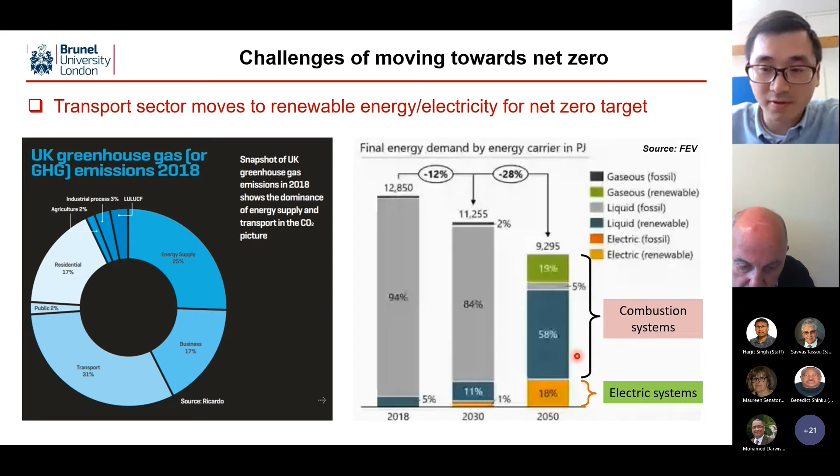So hydrogen is an excellent renewable energy carrier. If we produce hydrogen using water electrolysis and renewable electricity, it can be produced from solar energy, wind energy, or other renewable sources. Then we'll be able to produce net zero hydrogen, which can be used in industry or for the transport sector to speed up the decarbonization process.

Currently, more and more countries are committing to work on research and development of hydrogen technologies. In the UK, the government has set out the UK hydrogen strategy, and the recently published 10-point plan also highlights the significance of hydrogen energy.

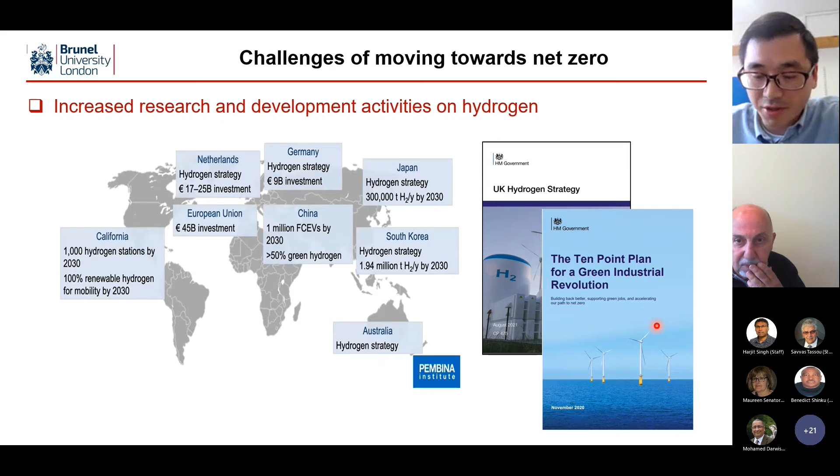However, it is not straightforward to apply hydrogen in industry, and in particular in the transport sector. There are mainly two barriers. The first one is hydrogen storage.

The second barrier is hydrogen infrastructure, because hydrogen is not compatible with existing fuel stations. So we need to put a lot of investment into hydrogen infrastructure, and it can take a very long time to complete. So it will be very difficult to realize immediate carbon reduction targets.

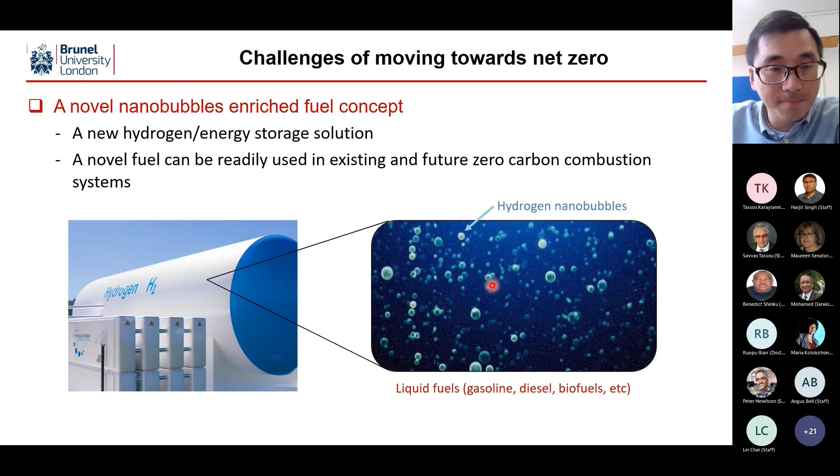What are nanobubbles? Nanobubbles are unique bubbles compared to larger bubbles. They are very, very tiny—we can't see them directly—but compared to larger bubbles, they can stay stable in liquid, because larger bubbles can easily escape from the liquid due to buoyancy. The right graph shows optical measurement results of hydrogen nanobubbles, and we can see these tiny bubbles.

They can keep stable for almost 3 months, so they are quite unique.

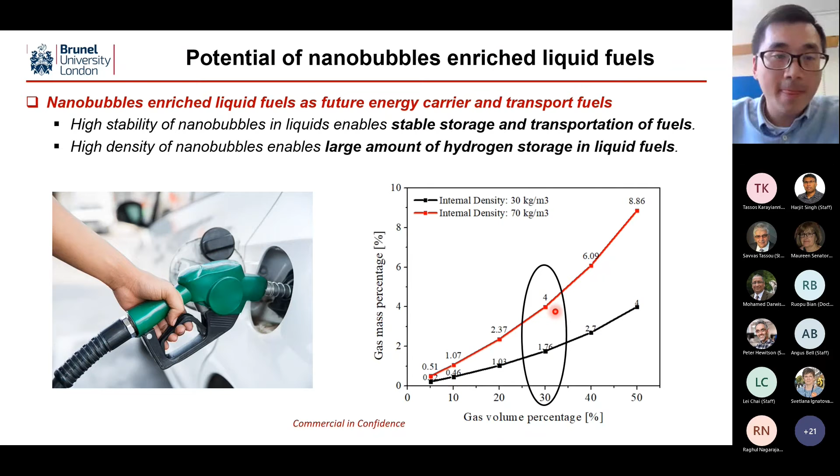Another key benefit of nanobubble fuel is we'll be able to improve the spraying process. As highlighted by the right graphs, we'll see better atomization of the injection process if we add bubbles into liquid fuels. The lower part of the results shows the spraying without bubbles.

However, for conventional technology, adding large bubbles causes a problem of unstable spraying process, because large bubbles can disappear or evolve into smaller bubbles, so the spraying process is not stable. But using very stable nanobubbles will resolve this issue and make use of the improved spraying process.

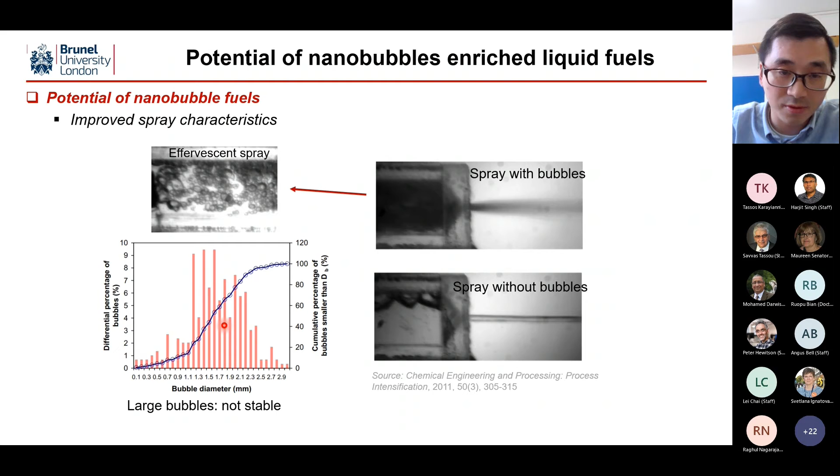The second benefit is improved combustion process due to the significantly higher flame speed of hydrogen. The higher flame speed also enables lean combustion and ultra diluted combustion for the combustion system. This will be able to improve engine efficiency and reduce emissions.

In summary, the proposed nanobubble fuels will have immediate CO2 reduction due to higher calorific value, lower carbon content, and improved atomization and faster combustion, as well as being applicable to existing infrastructure for faster adoption of the fuel concept.

Secondly, we'll be able to achieve net zero if we are using renewable liquid fuels, for example ethanol or methanol, as the base fuel. This will be enabled by faster flame speed and higher calorific value due to the added hydrogen.

We also did a calculation of the potential for CO2 reduction. Similarly, by adding 30% of hydrogen nanobubbles by volume, we'll be able to achieve around 15% CO2 reduction.

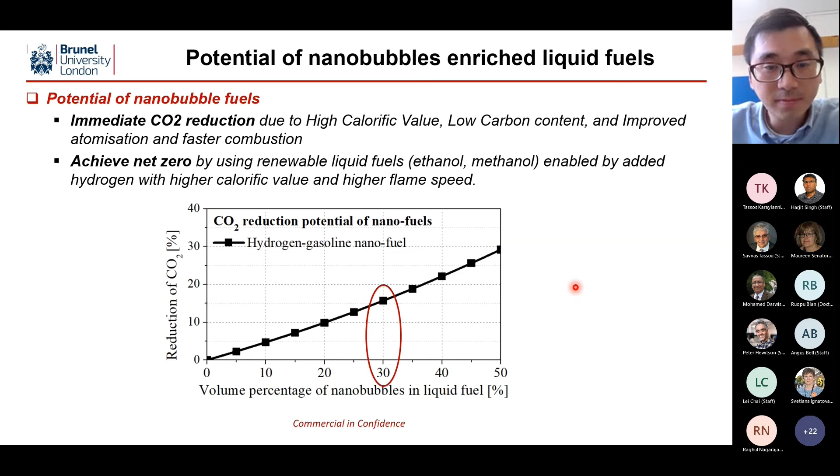As mentioned by Tassos, recently we got another EPSRC project on a completely new net zero future fuel. The concept is we combine ammonia and hydrogen nanobubbles.

We know ammonia is another important zero carbon vector for future transport or industry. However, ammonia has some disadvantages in terms of lower flame speed as well as lower calorific value. So it will be a great combination if we add hydrogen into liquid ammonia.

The concept is we use renewable energy to produce hydrogen as well as ammonia, then put hydrogen nanobubbles into liquid ammonia. Then we'll be able to use this new fuel in existing transport sectors, and the produced exhaust will be only water, so it can be recycled to produce the fuel again.

The novelty of this concept is it is a completely carbon-free fuel, and the added hydrogen can optimize the combustion process, increase energy density, and the combination of the two will improve engine efficiency.

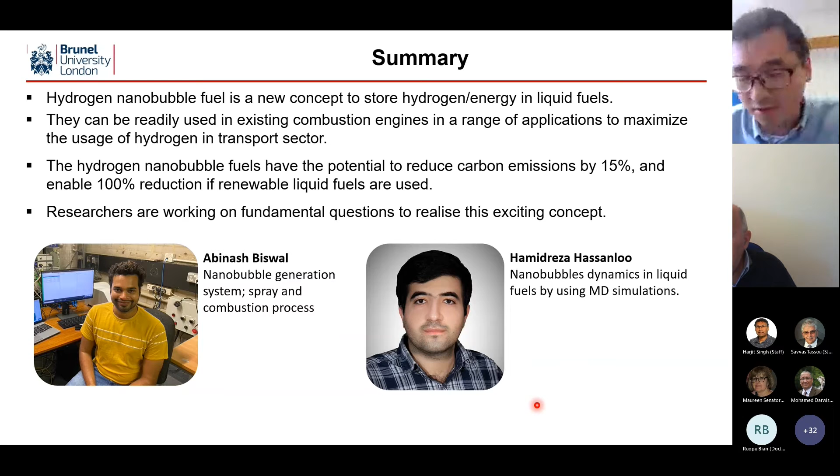Brilliant presentation, very clear. Can I pass it on to the floor for questions or comments? We've got a good 5 minutes. Please just unmute yourselves and ask your question. I see some raised hands. Who is raising their hand? I am. Okay, can you please ask your question?

How and what will be the technology to make the nanobubbles? That's a good question, and we have a number of choices. Currently we have a pressurized system. Basically, you combine liquids with both liquid fuels and gaseous fuels. You compress the liquid and then release the pressure. It's like opening up a Coke - you'll see the bubbles coming out. But if you repeat the process, you produce nano-sized bubbles in the liquid, but you can't see them. Maybe you would find it if you measured the Coke. Have you tried it? Yeah, we tried it, yes.

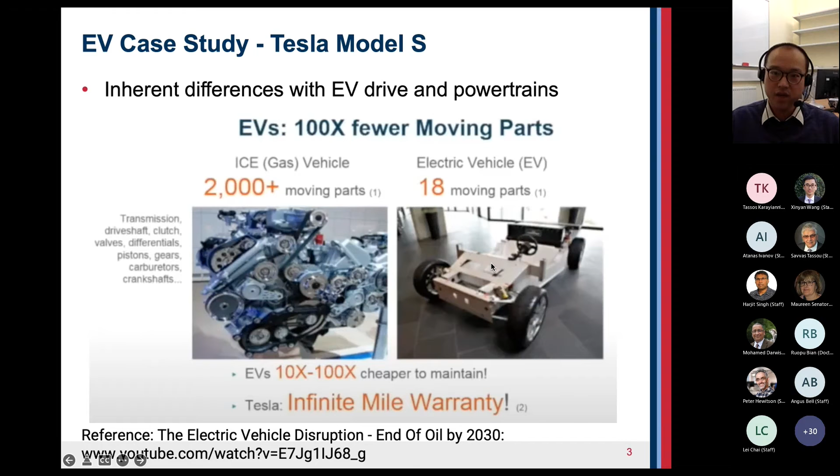In this case, the reliability can be enhanced greatly. And in some cases, for example Tesla, they mention infinite mile warranty for some of the parts because they are so confident that, in some cases, the motor will last for many, many years.

So for the electric vehicle, as I mentioned, the battery and the motor are the key components, and of course there are other components as well, which I will talk about more in the coming slides. For electric machines or motors, it has been investigated since even the early 1800s, for example the DC machines and AC machines, where DC is direct current and AC is alternating current. There are some names like Thomas Edison, who promoted DC, and Nikola Tesla, who promoted AC systems. So in this case, the machines have become a very mature technology already.

And of course, it's been an ongoing research area for electrical machines, making brushless machines with better performance, efficiency, and that last longer. And for the battery, of course, electrochemical cells have also been researched for a couple of centuries before.

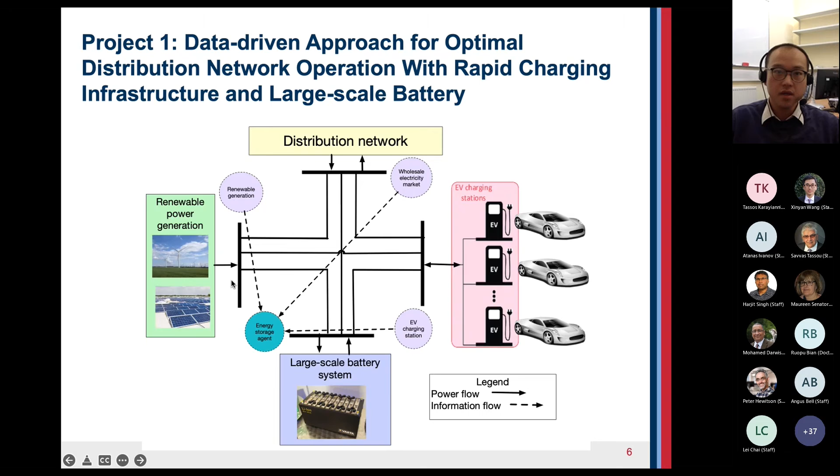As the project is coming to an end, we have some publications already presented at conferences, as well as journal articles. This month, we had a paper accepted on a distributed optimization model for mitigating three-phase imbalance with EVs and grid battery. The idea is that distribution systems use three-phase power, but for EV charging, typically each EV could be using single phase.

How to maintain three-phase balance when electric vehicles are charging using single phases is addressed in this work. The ongoing work is about profit maximization for large-scale energy storage systems to enable fast EV charging infrastructure in distribution networks, mainly using reinforcement learning to maximize the battery operator's profit based on several uncertainties using a data-driven approach.

This second project, a collaboration with partners from Indian universities as well as the government, is about the electrification of public transport and intermediate public transport in Indian cities. India also has a very high interest in decarbonization in transport, and one interesting point is that a lot of citizens rely on intermediate public transport, such as three-wheeler and two-wheeler vehicles, which they use both for transportation and charging.

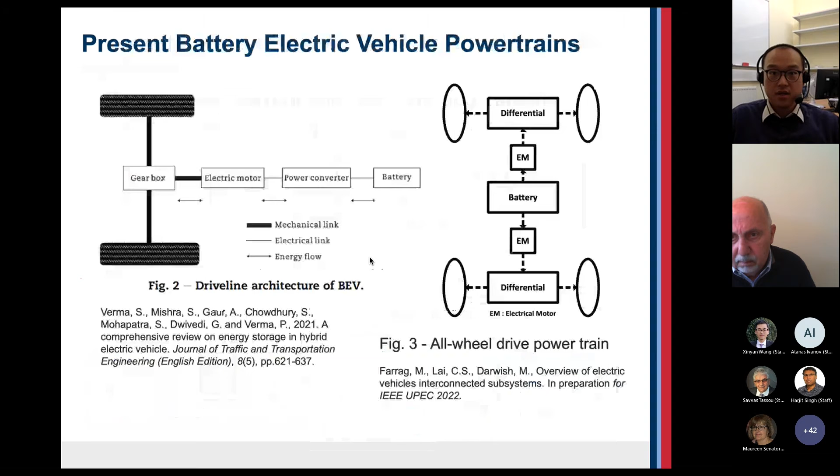I'll skip this slide. Presently I'm also supervising a couple of PhD students, as well as one MEng group project related to electric vehicle systems optimization and electric vehicle drivetrain optimization. Thank you very much for your time, and please feel free to contact me if you have any interest in my research.

Thank you, Chun, excellent. I think we have a raised hand from Mohammed, if I'm not mistaken. Good morning everyone, thank you very much Chun for the excellent presentation.

Just two quick questions. The large-scale battery system, is this special batteries, or is it second life electric vehicle batteries? At the moment we just consider it as a base case lithium-ion, just a standard battery, so it's not second life or an alternative energy storage.

Your question is very relevant, because to be honest I'm not very fond of using batteries for grid-scale storage as they degrade quickly and are expensive. There are other kinds of stationary energy storage available, like thermal energy storage, and in my postdoctoral research I investigated the economics of thermal energy storage, which is also very beneficial.

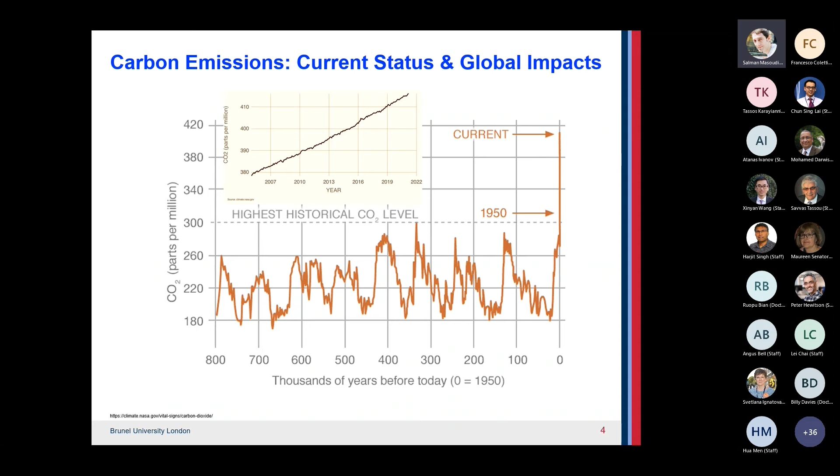So why is it really important? As we all know, it is evident that the atmospheric concentration of CO2 has been sharply on the rise within the past decades. Now it's currently standing at about 410 ppm. As it can be seen here, there has been a clear soaring rise in carbon concentration just within this and the previous century. Now, this increased atmospheric CO2 concentration will give rise to global temperatures, which will bring about catastrophic side effects as a result of climate change.

As a result, it has been internationally agreed to limit the increase in global temperature to less than 2 degrees C, as we all know. But unfortunately, with business as usual, an increase of 6 degrees C appears to be well within reach, which would render an extensive geographical regions uninhabitable.

Now, there has been a significant increase in global carbon emissions with a fairly steep projected rise within just the next few decades. Most of these carbon emissions, however, originate from transportation, industry, and power sectors, as you can see here, with other sectors generally contributing to smaller shares of such emissions.

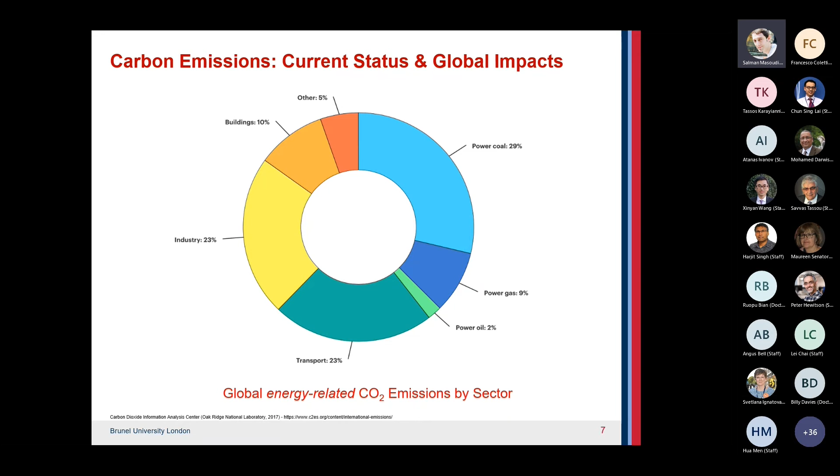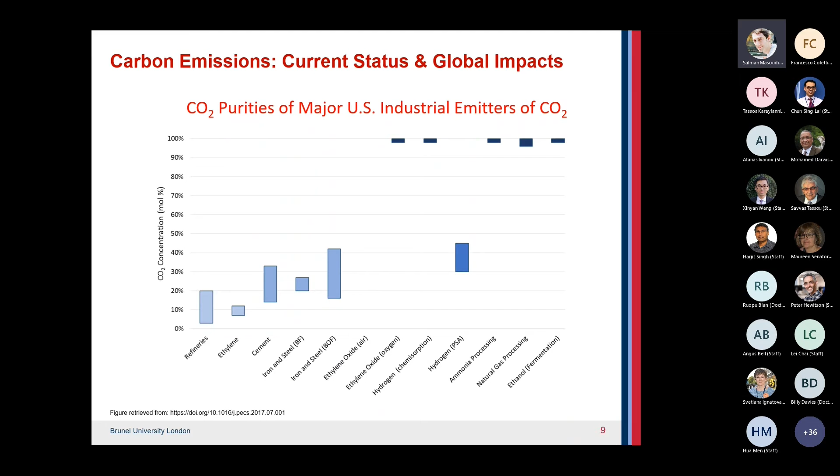Now, having this said, the quality of such carbon emissions is highly industry dependent, as seen here. So it ranges from 3 to 4% to near pure CO2, depending on the process involved. This will in turn dictate the difficulty of separation and challenges involved in terms of energy consumption and hence the total process expenditures.

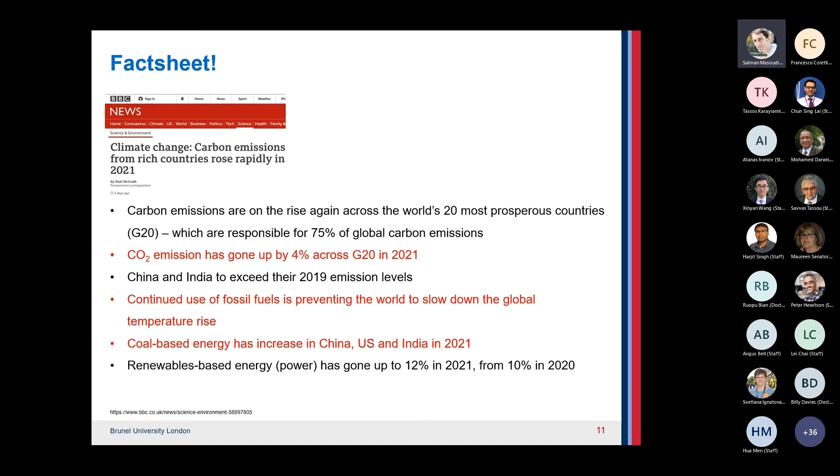Now, this slide shows the carbon emissions have been on the rise in 2021 across the most polluting nations around the world. The continued and in some cases the increase in coal-based energy has been another contributor to this observed increase. Overall, the message here is that although we are moving towards a fossil fuel-free world, there is still quite a few steps to take in order to get there in our lifetime.

Now, as reported just recently, climate impacts have sadly led to a considerable loss of lives around the world and imposing huge economic costs.

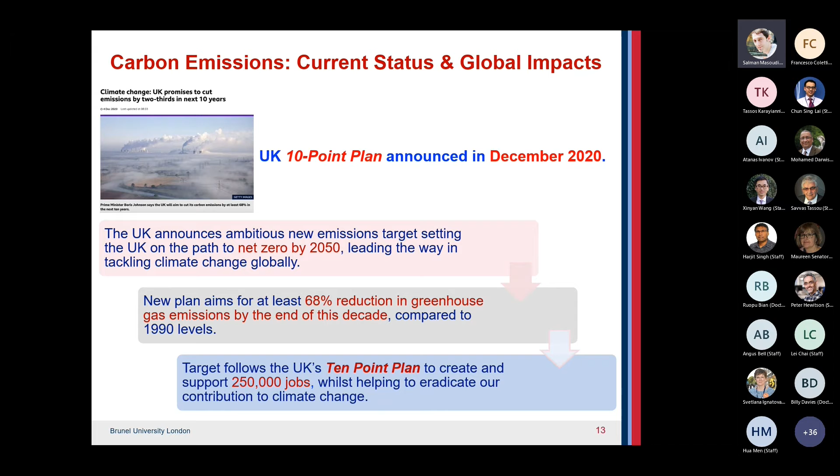Now, based on this, in December 2020, the UK announced its ambitious 10-point plan to meet net zero emissions by 2050, which was previously set at 80%. This will then bring about a significant economic boost to the nation. Now, interestingly enough, the 8th point in the plan is directly linked to carbon capture, utilization, and storage, with significant funding to support industry and create new job opportunities across the country.

Even better, early last year, the UK announced its industrial decarbonization strategy, which is a little bit different from the power sector. And this aims to generate 20 terawatt-hour per year of low-carbon power in industry by the end of this decade, while capturing 3 million tons of CO2 per year. So this is quite a significant amount. So all this shows the extent of urgency and commitment for the deployment of CCS technology in the UK.

Now, we can also see that 2 major CCS clusters have been just given the green light for deployment, and this would simply give access to about 41 projects to basically utilize and exploit these facilities. And biomass combustion with carbon capture and direct air capture have also under development for deployment by the end of this year in smaller scales, obviously.

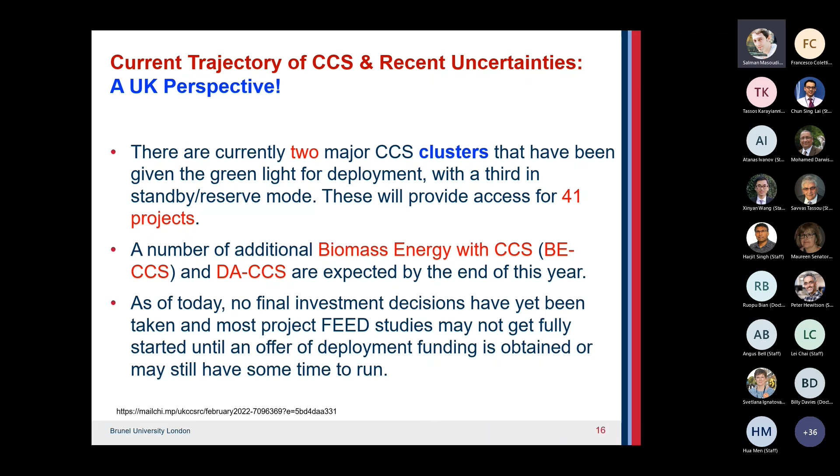Now, if we want to have a UK perspective and the current political climate in the world, we can see that the current war that is going on in Ukraine, it's led to a significant rise in gas prices. Now, this has now brought about a high degree of uncertainty in regards to the future economy and may well impact the funding allocation and decisions for CCS as a whole by the Treasury in the UK.

Now, the message here is that if we want this to go ahead, we have to come up with blue sky thinking and making sure that we're able to have some sort of radical thinking to make sure CCS projects would take off just in time.

Now, a little bit on the what and how with regards to CCUS. So let's see what CCS is. CCS simply refers to a collective set of technologies that comprise capturing CO2 and then either using it to produce other value-added products or basically permanently storing it in the ground.

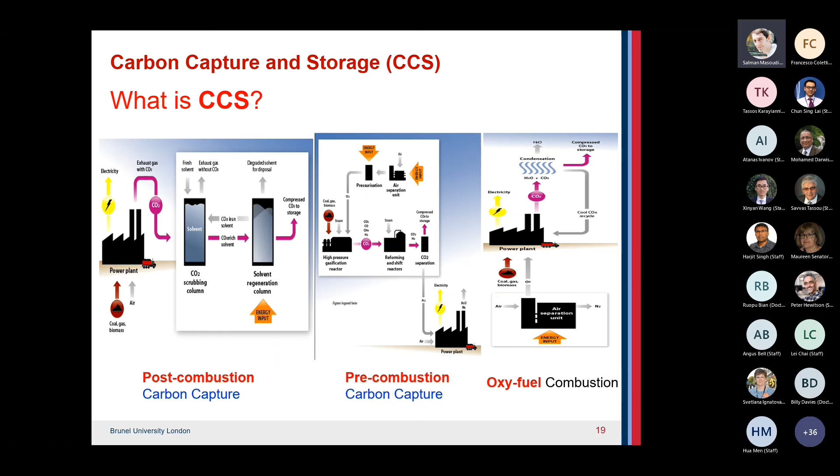CCS is typically classified into post-combustion capture, pre-combustion capture, and oxy-fuel combustion, depending on the way carbon is captured in the process. Post-combustion carbon capture, which is the topic of this presentation today, involves capturing CO2 at its emission point, such as power plants, flue gases, and industrial processes such as hydrogen production. I will now expand further on post-combustion carbon capture within the next coming slides.

Besides the strong political incentive and operating challenges of capture plants, the key barrier to widespread deployment of CCS is the relatively high cost, as with any other technologies. High capital and operating expenditures are the main barriers for the deployment of the capture technology at a scale at the moment. However, we have to bear in mind that as with any other technology, the associated costs would initially go through a rising phase, after which they begin to fall. Once the first of a kind process is commercialized, then these costs basically will begin to come down or become more economically viable.

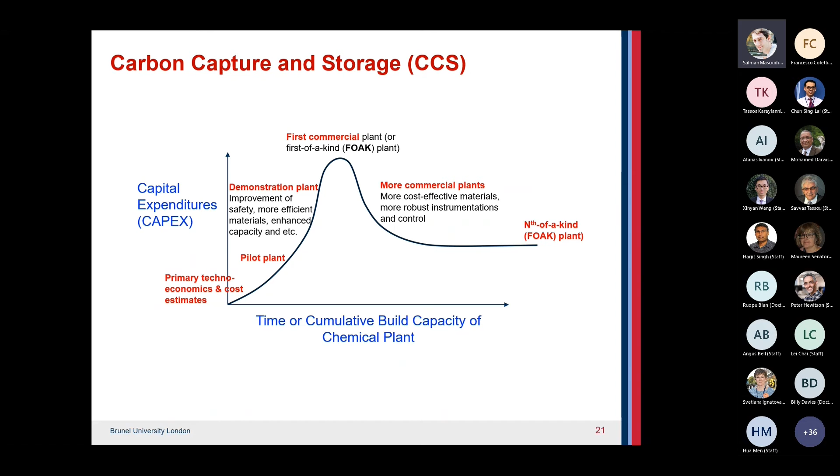Now, there are several research gaps in this area, which for most part would require further improvement. The first one, which you can see here at the top of this slide, is basically the most challenging issue, which is the energy consumption of the reboiler in the stripper. This is obviously the main challenge associated with absorption-based carbon capture technologies.

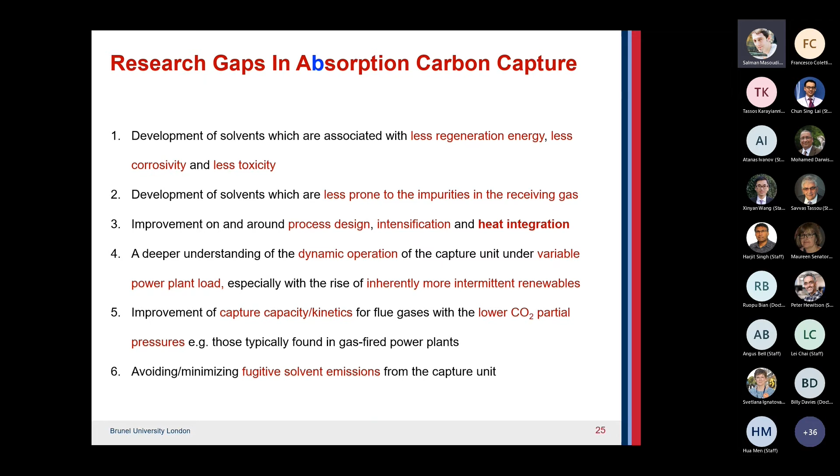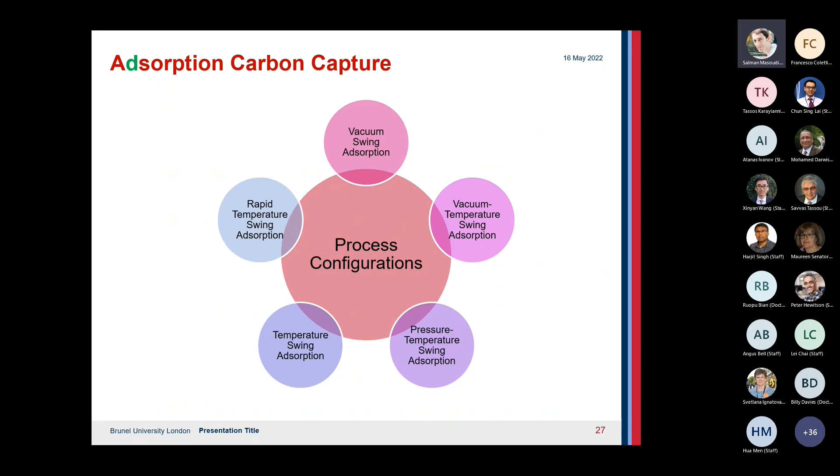Now, the regeneration of adsorbent is normally done by changing the temperature or pressure of the column, hence the temperature or pressure swing. In more complex processes, a combination of these technologies have been employed to improve the overall efficiency of the process. You can see here on this slide, such as vacuum swing adsorption, rapid temperature swing adsorption, pressure temperature swing adsorption, and so on and so forth.

In principle, step-by-step process development in adsorption CCS begins by developing a new adsorbent material and then tailor-making existing adsorbents for a specific CO2 separation, depending on the properties of the inlet gas. The next step is to prove the concept: we study equilibrium, kinetic, and heat of adsorption studies, mass transfer studies, and conduct feasibility studies, which lead to a good understanding of the viability of the process itself.

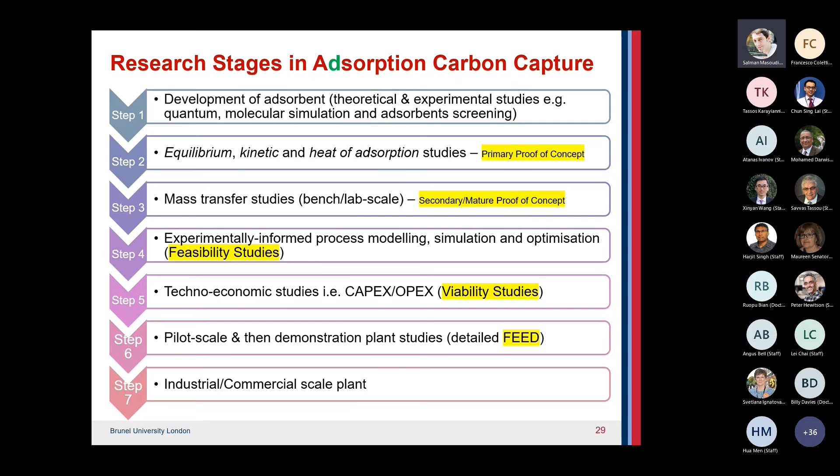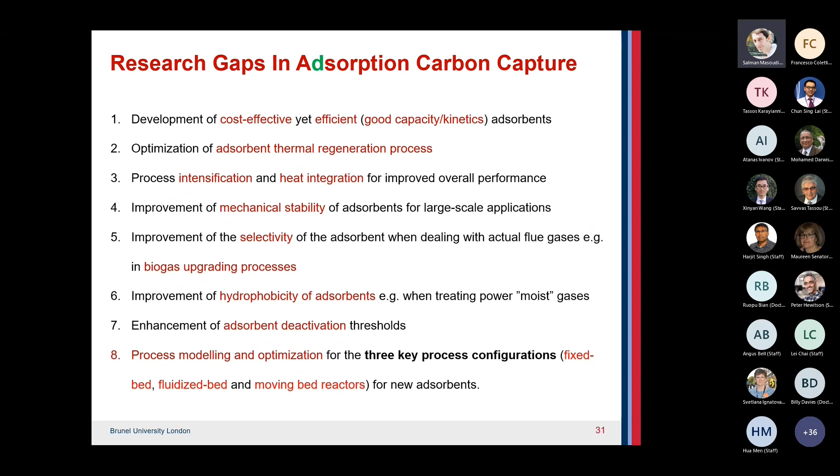These are some of the challenges associated with adsorption processes: the adsorption capacity, the kinetic and equilibrium capacities, the adsorbent itself, its thermal and mechanical stability in the process, selectivity, and the energy consumption for regeneration. These are some of the very important challenges we are basically facing at the moment.

In terms of more recent research directions, there seems to be an increasing interest in integrating artificial intelligence with CCS in order to improve process efficiencies. This is typically done by generating data and then using it to develop and train an artificial neural network, or ANN. The developed ANN would then be able to predict the behavior of the process and ultimately pinpoint the optimum separating conditions for a specific separation.

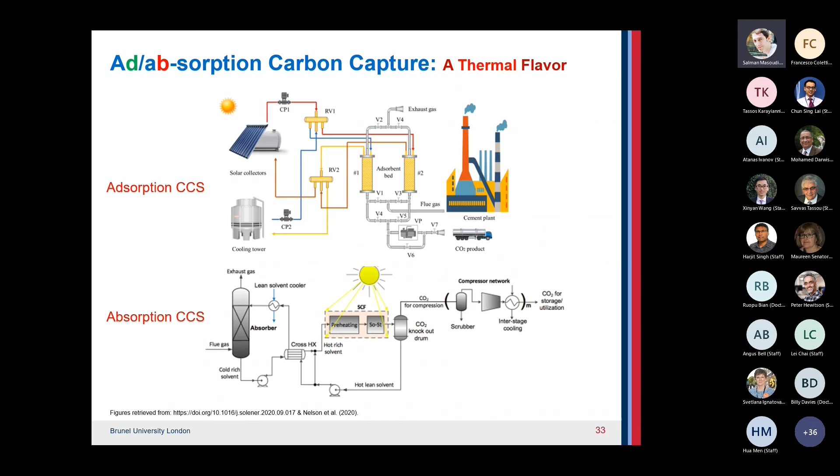There has also been increasing interest in employing solar energy in the regeneration of sorbents. This is where the research we do here in Brunel meets with some of the research going on in mechanical engineering, for instance. This renewable energy can be integrated with a circulatory boiler in the case of absorption CCS, or with a desorption column in the case of adsorption CCS. Such examples are depicted here on this slide.

Now I want to move on and talk a little bit about biomass energy with carbon capture, which is a roadmap to negative emissions. This is part of the research that I do in my research group, as well as an important aspect in meeting net zero emissions within the first half of this century.

The combustion of sustainable biomass is a net zero emission process. This is because during the combustion of biomass, only the CO2 that was previously removed from the atmosphere during the plant's growth is put back into the atmosphere. However, if this CO2 is further captured, i.e. BECCS, we are looking at a negative emission process, which combines biomass combustion and post-combustion carbon capture technologies.

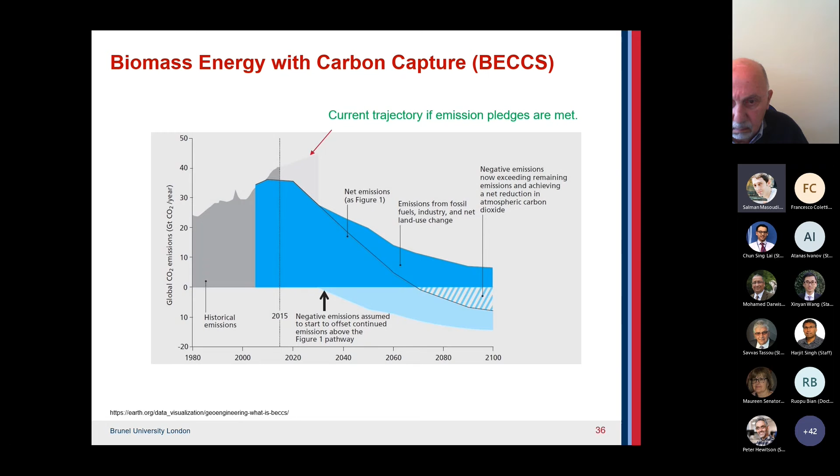So what has been done around BECCS in the context of negative emissions in the UK, and around the globe? There are only a few commercial scale BECCS plants in the world, with many more to be built in the years to come. Drax, the largest power plant in the UK and traditionally a coal-fired power plant, is now the world's largest biomass-fired thermal power plant. This means Drax is now well on track to achieve net zero emissions.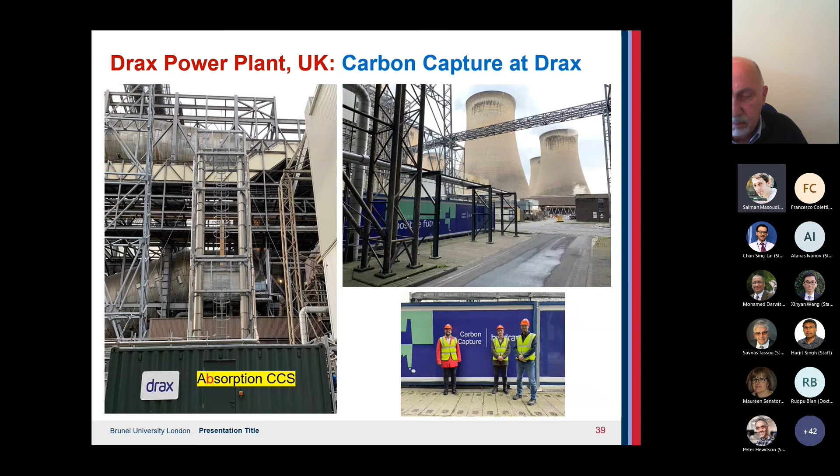Moving on to the last part of my presentation, which is my research around BECCS. Again, this is a schematic of a power plant. You can see some of the solid residues that are basically produced at the plant. What we have thought about is to use this material that is being produced on site and exploit it to produce some value-added materials, or adsorbents, in this case.

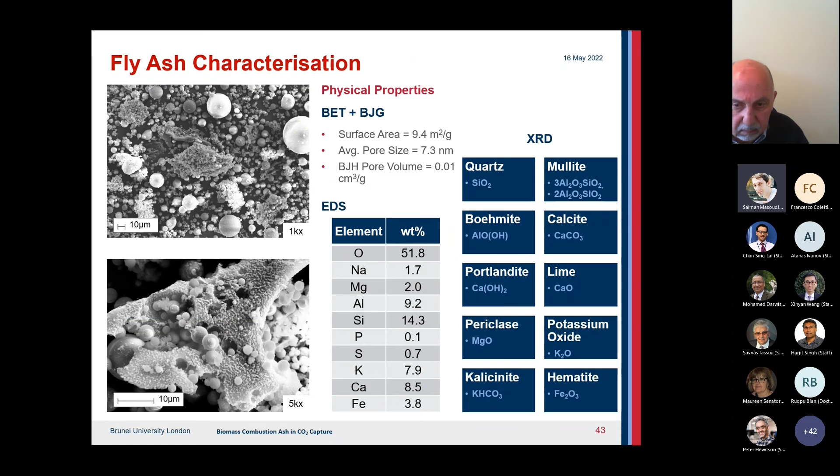We managed to use fly ash and bottom ash generated at Drax to produce two different types of adsorbent materials to capture CO2. Here are some of their properties, and you can see the capture capacity of these materials, which is very good compared to commercial grade activated carbon or other adsorbent materials in industry.

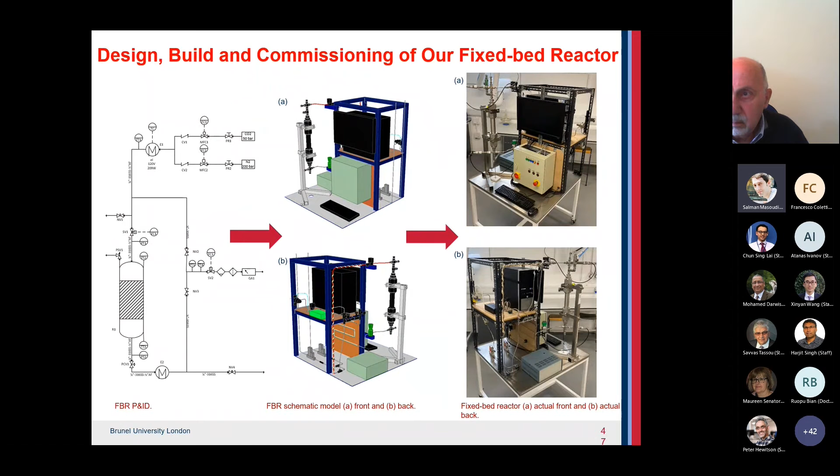This is an adsorption rig that we've built in our group as part of a funded project, and the work of one of my PhD students, Ben Petrovic. Here you can see the work that Ben has successfully completed in my research group. These are some of the steps we normally take to evaluate the efficiency of the adsorption process for one specific separation.

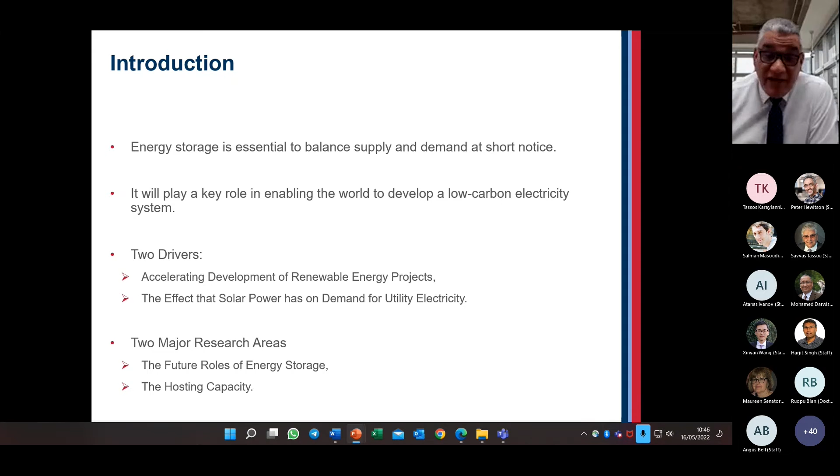After these two drivers, I will present very briefly the two major research areas we are working on in BEPS: the future roles of energy storage, and a very important term nowadays, which is called hosting capacity. So the first driver is accelerating development of renewable energy projects.

According to the expectations of the International Energy Agency, there is an expected average of around 305 gigawatts per year between 2021 and 2026, according to the main case forecast. As we may know, there are three cases which IEA considers: main case, accelerated case, and net zero scenario.

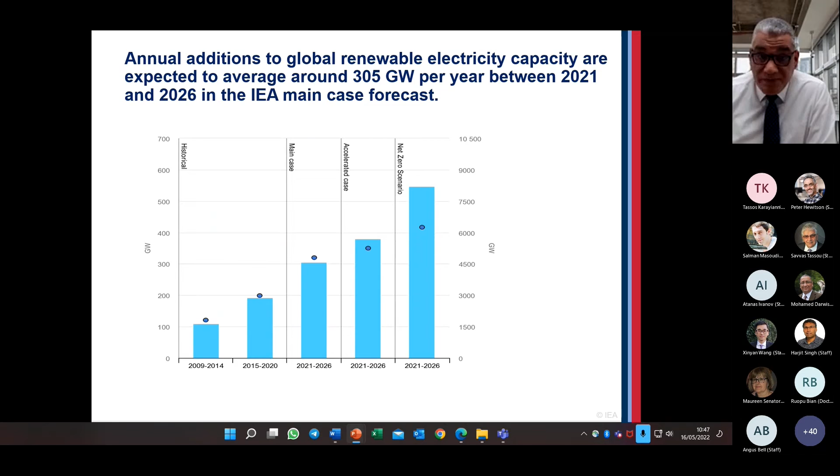Care should be taken in the transition into 100% renewable-based systems. We all hear nowadays that we are looking forward to having a 100% renewable energy system, which is not easy to reach unless we take into consideration some of what will be presented in this presentation.

The second driver for our research is the effect that solar power has on demand for utility electricity. There's a very interesting story which gives a general audience an idea about this - it's called the duck curve. The term was coined in 2012 by the California Independent System Operator.

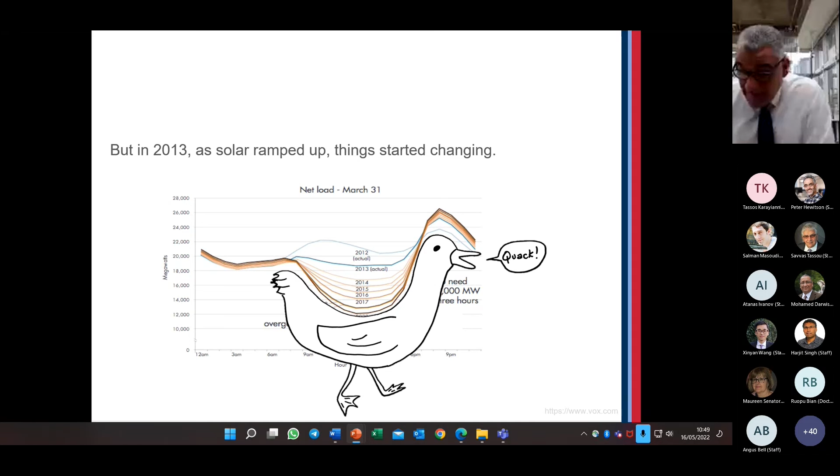All utilities worldwide would like to see the camel-shaped load curve - this is the normal behavior of electricity demand worldwide. But with the increase of photovoltaic installations, mainly in California in 2013, we started to see that the load curve began converting from a camel shape to a duck shape. If you Google it, you can see the duck curve, which has become increasingly discussed on the internet due to the massive increase in the installation of solar energy.

To flatten the duck curve, there are two major solutions we are working on: interconnections between countries that can support the massive increase in solar generation, and energy storage, which is the focus of my presentation today.

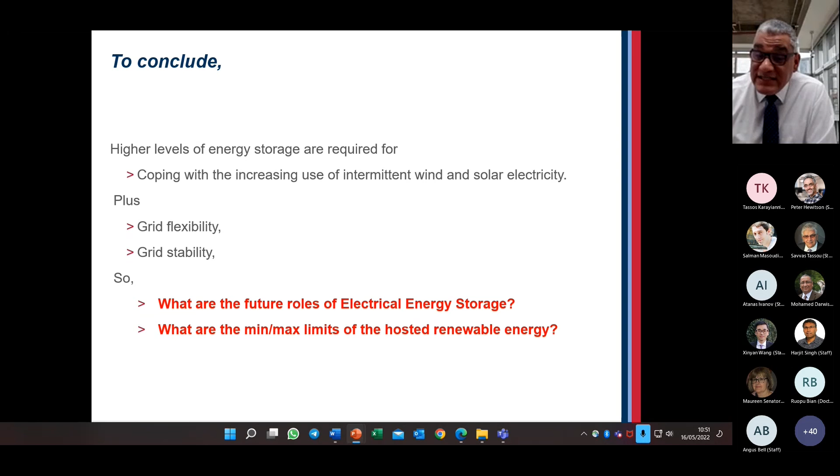To conclude, higher levels of energy storage are required for coping with the increasing use of intermittent wind and solar electricity. Plus, we need grid flexibility as well as grid stability. So there are two questions that must be answered: what are the future roles of electrical energy storage, and what are the minimum and maximum limits of hosted renewable energy in any grid? This is what is called hosting capacity.

Regarding energy storage, we all know about the different technologies, and I'm concentrating on the electrical energy storage. We have chemical form, we have mechanical form, we have electrical form, different technologies, as you can see on the right-hand side, are available in the market, but till now we haven't used them at the grid scale of the electricity grid.

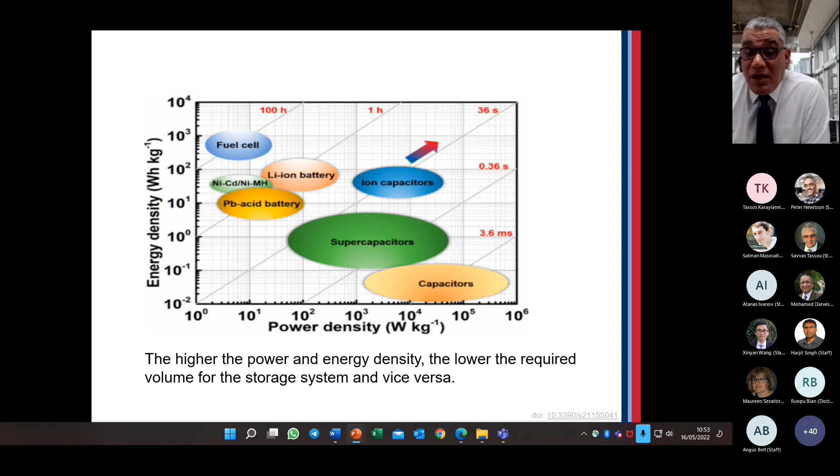Comparing all of these technologies together, we can see that the higher the power and energy density, reaching the top right corner of this curve, the lower volume of storage we need. This is very clear when you see the capacitors there, because capacitors need lower volume than any other technology. But going to lower energy density and lower power density, reaching the bottom left corner of this graph, we need a huge volume. This is really clear by seeing the battery there.

We have different applications for energy storage, so we are working on power scale applications, and we can see not all technologies can work here. We have compressed air energy storage and pumped hydro energy storage, which are geographically limited - not every country in the world can install pumped hydro storage. From the electrical energy point of view, pumped hydro storage is the gorilla of energy storage; we have 120 gigawatts installed in worldwide electricity grids. From an economic point of view, batteries are still expensive, and compressed air energy storage above ground technology is also still expensive.

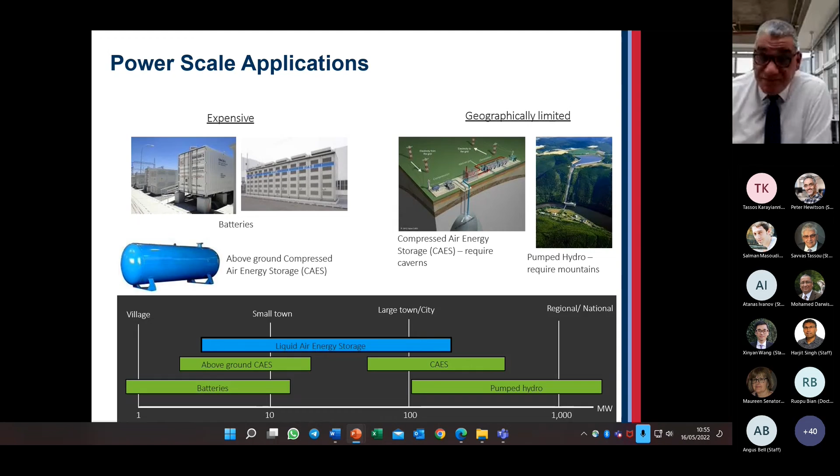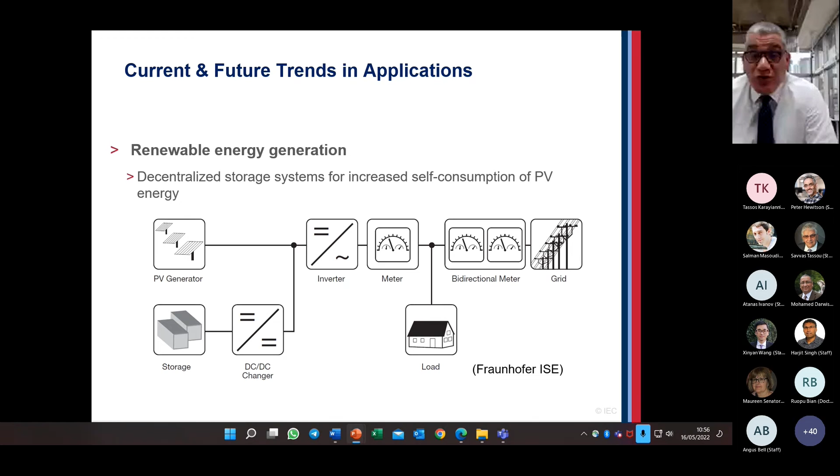We have smart grids, and this is what we are looking forward to in the future. Smarter grids will become more active and will have to accommodate bi-directional power flow. This is a problem that increased from traditional electricity grids, because we only had one flow from generation to consumer. But nowadays, with more renewable energy installed at different levels of the electricity grid, we start to have bi-directional flow.

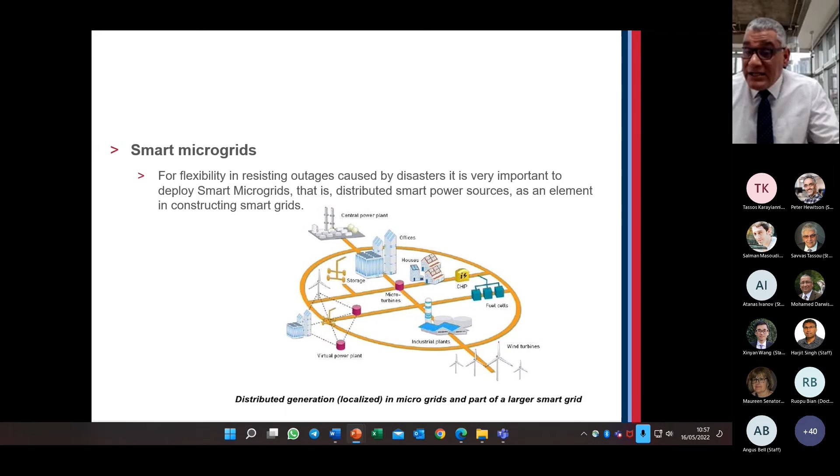We have smart microgrids - simply speaking, a microgrid is part of the big grid, which is the smart grid. This is one of the current and future applications as well. Smart houses are proposed in order to use energy more efficiently, economically, and reliably in residential areas. And we have electrical vehicles - I will not spend time here because it was covered in previous presentations, but future trends include vehicle to vehicle, vehicle to grid, and vehicle to home.

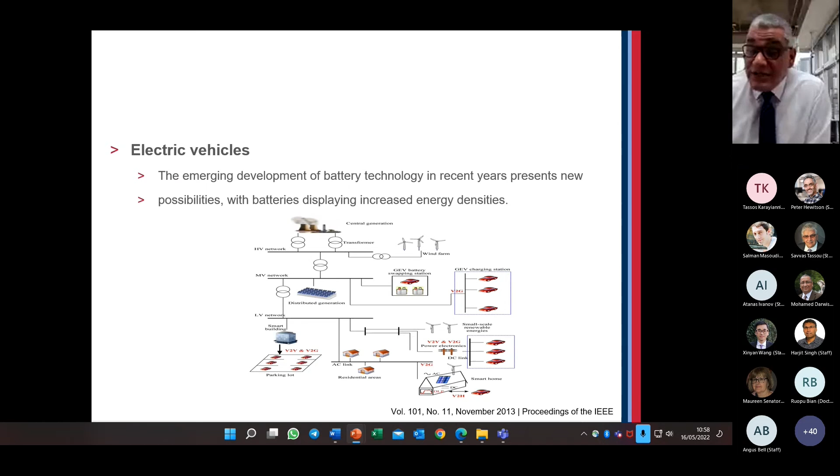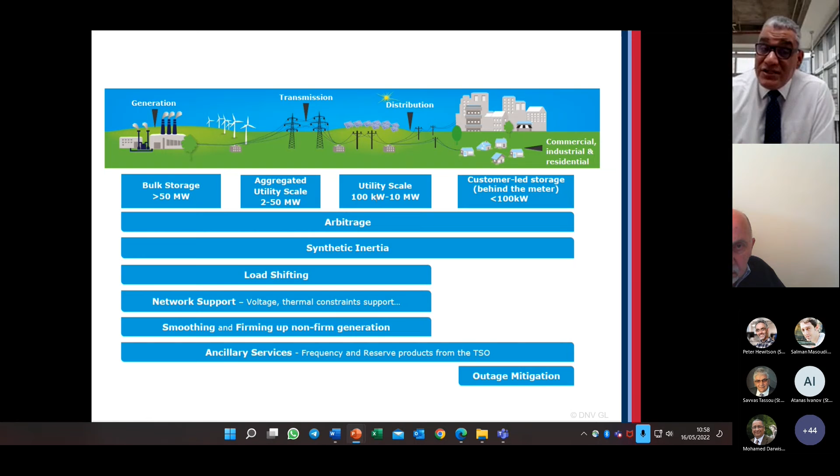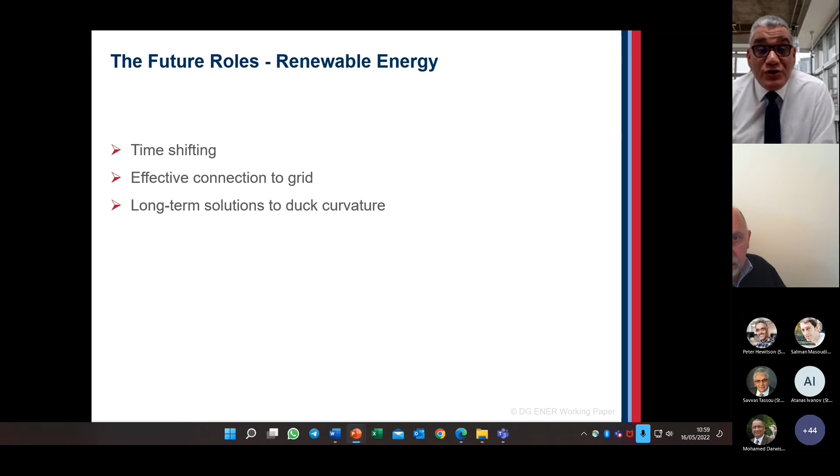Here you can see the future roles of energy storage when installing them at different levels of the grid, starting from generation to transmission level, to distribution level, or to consumer level. This schematic diagram gives an idea how we can install batteries, vehicles, or different energy storage technologies among the grid. These are the future roles, but according to the time, I am trying to be a bit fast to get us back on track.

Finally, the hosting capacity, one of the areas of research nowadays. What is meant by hosting capacity? This is the amount of distributed generation power integrated into the system at which system performance becomes unacceptable. So every grid in the world is limited with a certain amount of hosted renewable energy.

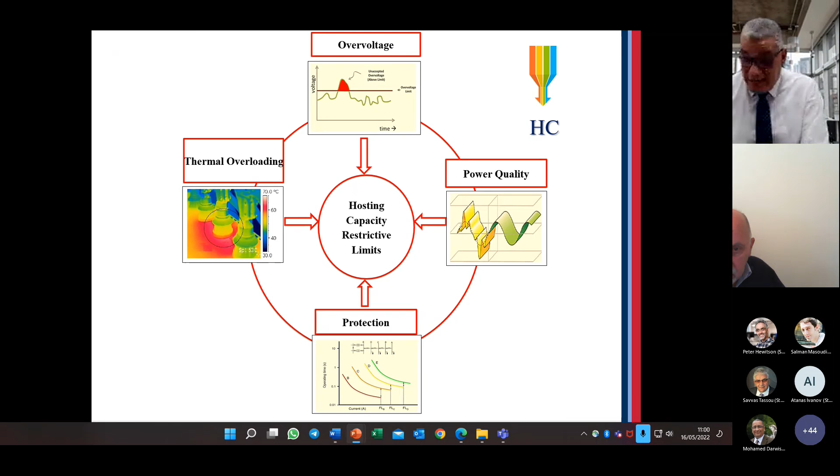Just to conclude my presentation: the next generation of the smart grid without energy storage is like a computer without a hard drive, severely limited. Thank you, thank you very much.

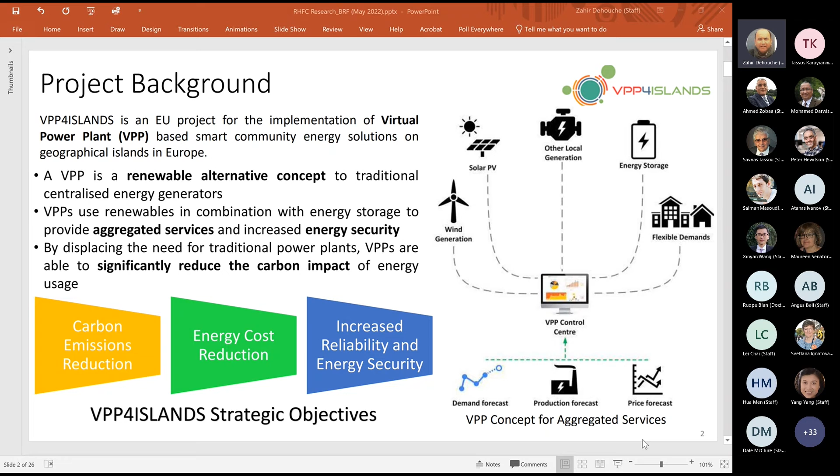We are using a hybrid system, based on fuel cell and batteries. When you combine these systems, there is actually a lot of synergy there. This allows us to increase the energy stored on investment, which is the energy payback. But we need to be careful about how that energy is actually dispatched.

This determines exactly the logic of energy dispatch: when battery is actually used, when we combine both fuel cell and battery for electricity supply, or when to prioritize renewable. These islands already have a certain capacity. Some of the selected buildings already have solar PV capacity, but without storage. The idea is to fully decarbonize these buildings using a synergy logic between batteries and fuel cell. But hydrogen needs to be produced.

That's why our system can locally produce hydrogen using excess electricity produced from renewables. It's green hydrogen, since we are putting green electricity into the electrolyzer. Hydrogen is stored. What we propose in the system is to store it for safety aspects, using solid structures, metal hydrides.

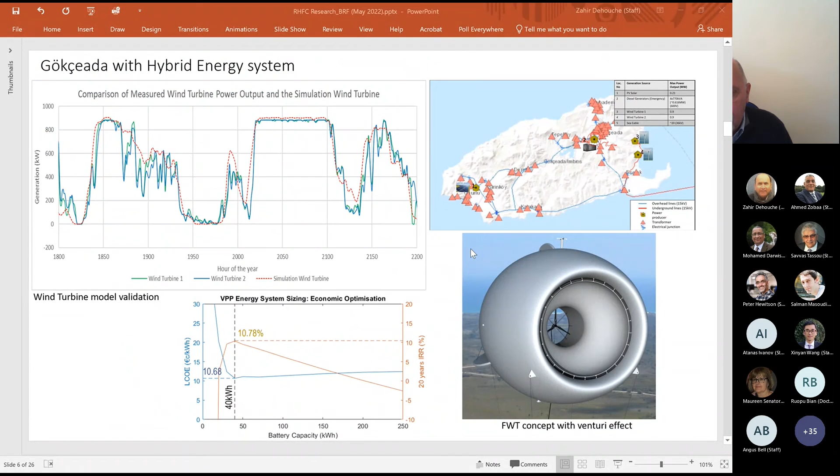Okay, fascinating work again. It shows the breadth of the work that we are doing in the institute and across the university. While Zahir is flipping through his slides, do we have any questions for Zahir?

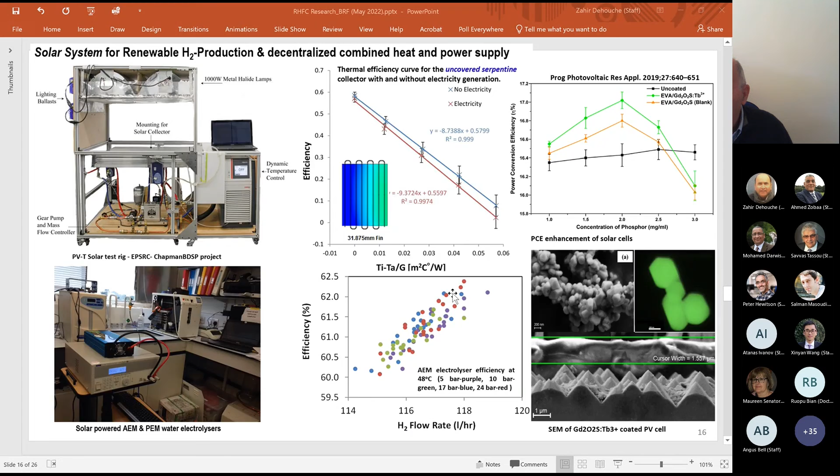I can ask maybe a question when maybe some others can think about it. Zahir, you are producing electricity from buildings and then you are taking it. Can you stop flicking the slides? Yeah, I'm just trying to find the buildings. Okay. In this particular slide, you are taking in electricity from buildings centrally and then using it back on the buildings. How does that compare with using it where you are producing it?

We use the electricity that is produced from renewables to produce, during the peak hours, the sun's peak hours, usually electricity is not used. Then the demand is relatively low. And it's the best time to produce hydrogen, because when you produce hydrogen or charge your battery, you are sure you are controlling the cost of that electricity when it comes back to the system. But of course, when you put it in a battery, you are increasing the electricity cost of that, because you have still to pay for the energy storage systems.

But the objective is, of course, during the off-peak periods when renewables are at low level and grid electricity is at high level—the grid electricity peaks between 6 p.m. to 9 p.m.—during that period, energy storage can be used to control the cost of electricity dispatched. I think the point is that you are giving some flexibility to the producer, using the energy storage.

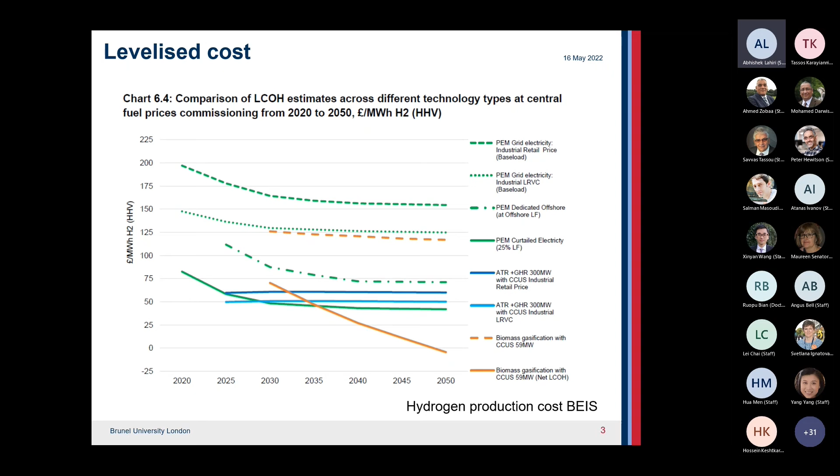The recent results, which I will show in the next couple of slides, have been patented, and therefore I cannot reveal what the additive is, but the energy consumption has reduced significantly.

In terms of electrolysis, there are three ways one can produce hydrogen. One is using an alkaline solution. The second is using an acidic solution. And the third is using a solid oxide electrolyte or solid oxide membrane.

With an alkaline solution, the working temperature for hydrogen production lies between 60 and 80 degrees Celsius. Here are the electrochemical reactions which take place at the anode and cathode. In case of polymer electrolyte membrane technology, the temperature is again between 50 and 80 degrees Celsius. Here you have an acidic solution, therefore you have protons, whereas in the alkaline case you have OH minus.

In case of solid oxide, unfortunately you require a temperature between 600 and 900 degrees Celsius, because you need oxygen diffusion in the solid oxide membrane. Although the temperature has been considerably reduced, the minimum temperature required for oxygen diffusion in the solid oxide is about 400 degrees Celsius. So although solid oxide technology is good because it's safe, the temperature requirement for diffusion is very high, and therefore this technology needs much more research to make it viable.

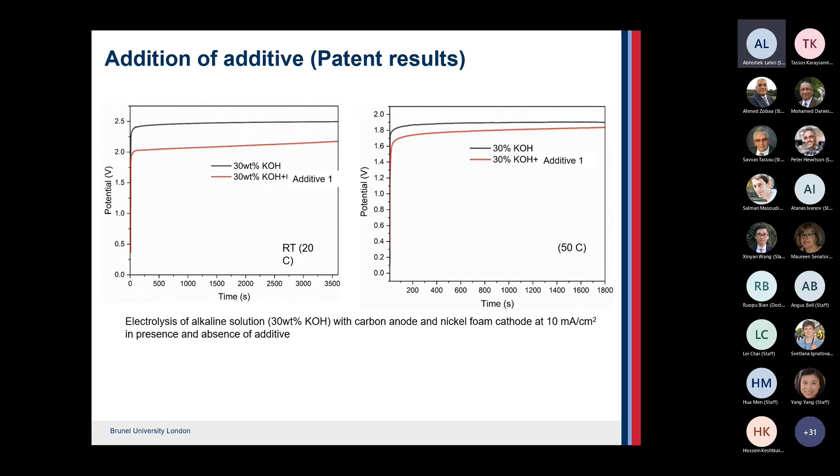One can use Faraday's second law of electrolysis, a direct substitution process, to calculate the amount of energy required to produce hydrogen. At room temperature, without the additive we have a slightly higher energy requirement, whereas with the additive, the energy requirement reduces considerably. So at room temperature, the energy saving based on Faraday's second law of electrolysis—we have assumed a couple of things here, assuming 100% efficiency and so on.

So we can clearly see that there is an energy reduction of about 17%. Now, in an industrial scenario, any energy reduction of even about 5% is excellent on an industrial scale. So a reduction of 17%, I think, would be pretty good.

Now, when we increase the temperature to 50 degrees Celsius, the energy saving decreases to about 9%. So here we have 17, here we have 9. There are certain points which have to be further investigated as to why the energy saving is lower when you increase the temperature. However, there are certain clues, and some more research has to be done in order to improve the energy savings.

Now, these experiments have been done, the use of additives have been done, extensively with various electrolytes and combinations of electrodes. So it appears that the additive is a universal additive, meaning that with whatever electrolyte or electrolyzer you're using, if you use these additives, it is obviously going to decrease the energy requirement for the production of hydrogen.

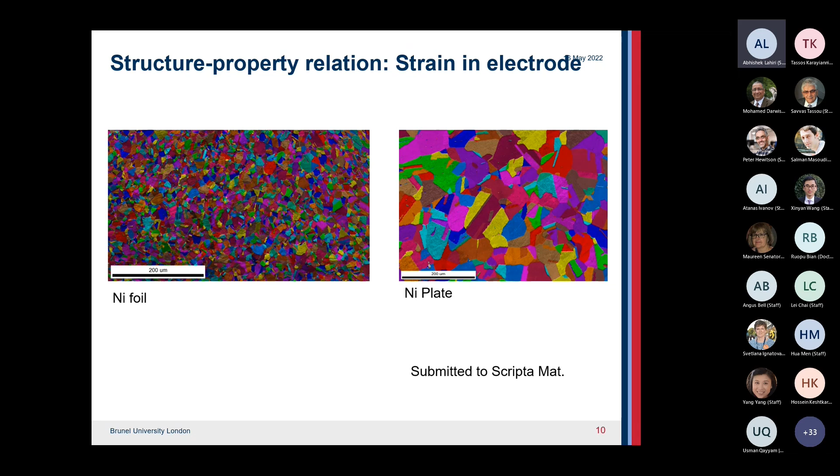Based on this, what can we conclude? Of course, there are challenges. The first conclusion is that compared to other hydrogen production methods, electrolysis is expensive but does not require a carbon capture unit. Steam reforming techniques need a carbon capture unit, so electrolysis would decrease cost, and we produce green hydrogen in this case.

In case of electrolysis, scale-up is simple and the setup is simple, although we have to look into making it a continuous process rather than a batch process. At present it is a batch process technique. We'll be looking into how to make it continuous, or look into experiments for a continuous process. It's possible to reduce the electricity requirement using renewable resources and using additives.

One thing we can clearly see is that it requires between 50 and 80 degrees Celsius of temperature. So we can look into other renewable resources such as geothermal energy to couple with these processes and decrease the energy requirement.

Also, we saw that strain improves the catalytic splitting of water and reduces the energy requirement. Certain studies have shown that this same process can be used for splitting seawater. Initial results show that the energy requirement for producing hydrogen using simulated seawater is efficient. However, there are corrosion issues which need more research.

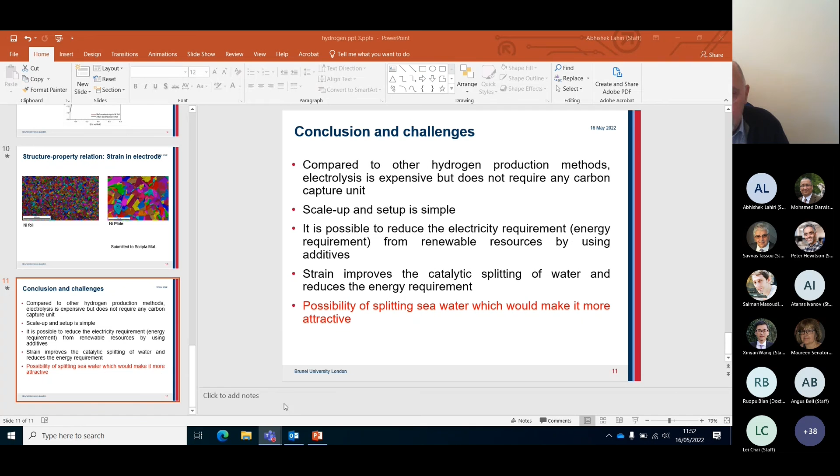Thanks for the wonderful presentation. I have a question regarding the transfer efficiency between electricity and hydrogen. Generally, what kind of efficiency can you achieve? The efficiency is about between 50 and 60%.

Oh, that is quite high. Thank you. Yeah, based on the experiments we've done in the lab, of course scaling up efficiency might decrease, but from the calculations we've done in the lab, it's between 50 and 60%.

Okay, thank you. That will include the use of hydrogen? Yeah, so it's direct conversion from electricity to hydrogen, that's the efficiency. To hydrogen use? Yeah, hydrogen use, what you want the hydrogen to do - that's the overall efficiency. Exactly. Brilliant, that's very good.

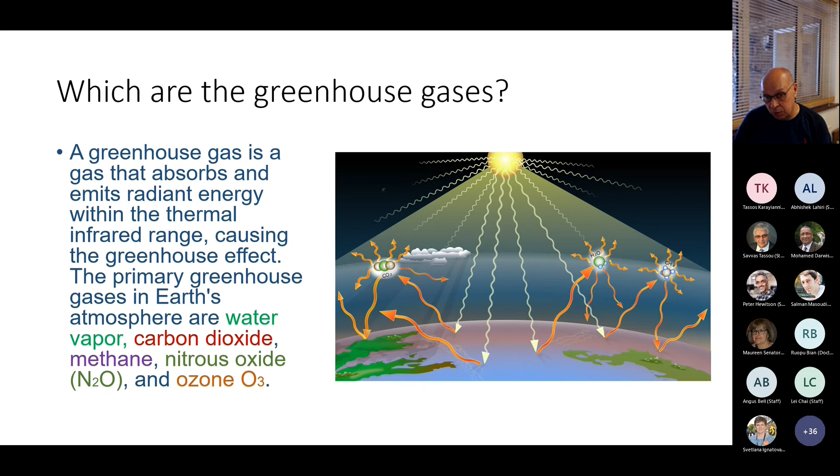Now, we as academics are inventing terminology which is later used by politicians and journalists, and the meaning of this terminology is twisted quite a lot. I'll introduce some of these things and then link them to the carbon footprint.

But from another point, if I make a company, I'm making a company to make money. So for me, the main thing for sustainability is, can I make money? I employ people, and of course I work, and my company is on planet Earth and uses the environment.

In here, it is a big problem of sustainability. Which sustainability? If you open the newspapers, majority of sustainability concerns the environment. But can we make a difference between carbon footprint and what newspapers are talking about regarding environment?

For me, sustainable manufacturing is before everything economy, which works in society to support the society, and has to consider the legislation imposed regarding the environment.

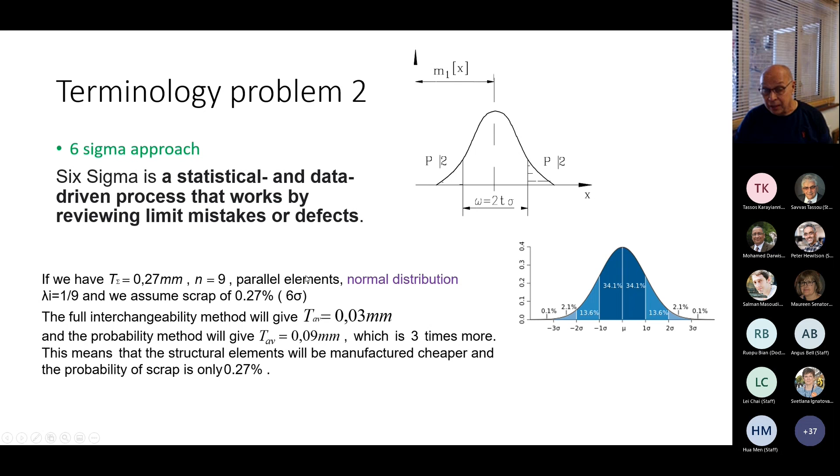In some cases, I may not even need to use Six Sigma. I can use Six Sigma if there are more than, say, 5 elements contributing to the outcome. But if there are fewer, the chances are completely different - it's like trying to play the lottery.

Lean manufacturing - I have an expression for this: is lean mean, or is mean lean? Well, lean manufacturing generally aims to get rid of things which do not give me enough profit, in a way.

There are 5 lean principles and things like that.

But when the crisis hit in 2008, a lot of UK companies adopted the principle of lean manufacturing, and managed to get rid of a lot of suppliers.

They kept everything outside, which wasn't actually helping them maintain their profit margins.

And then all this fell apart - the economy struggled a lot because they could not actually replace the suppliers. So this also contributes to the idea that I will get rid of things which are not generating enough profit for me.

And I can get rid of waste, but somebody else has to deal with it. So how is this helping me to be carbon neutral?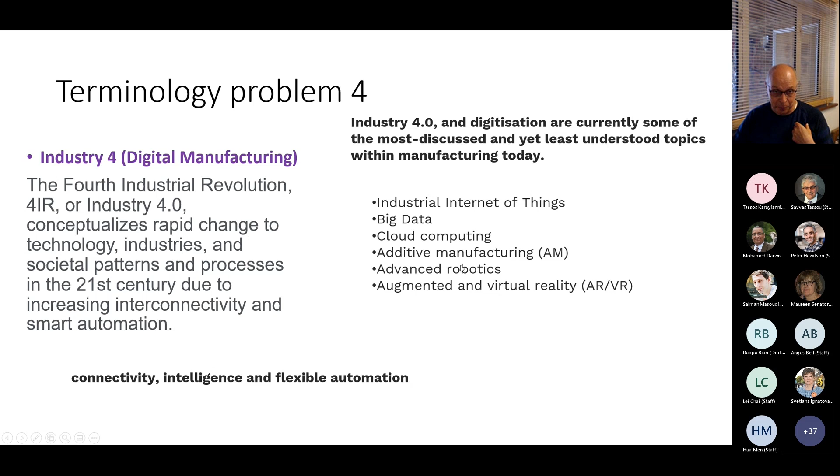As a general summary of all this, business or environment - I'm making a company in order to make money. The government and legislation have to make me follow specific rules. So, sustainable manufacturing has a direct environmental impact.

We have direct environmental impact because even some of the production can be focused on this. Six Sigma means less operation, less energy used. But again, I have to emphasize here, this is specific to a given country.

If I manage to get rid of this, somebody else has to take it on. So are we, as planet Earth, generally benefiting from this? I have my doubts. Lean manufacturing reduces waste.

Yes, we agree on reducing the waste, reducing the energy. And Industry 4 involves activities with less energy usage. Fine - not like steelworks, where I have to keep molten metal for hours.

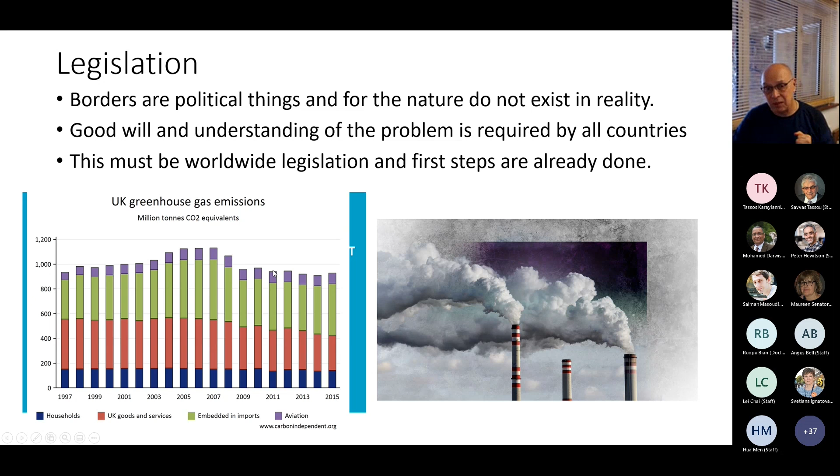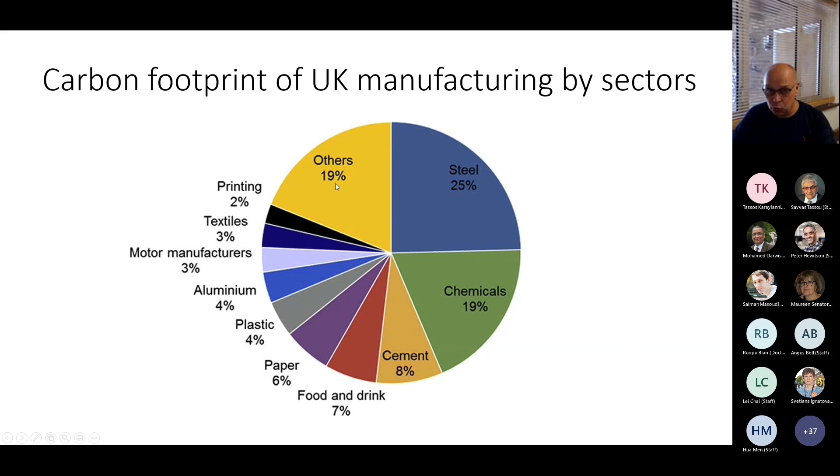What can I say in conclusion? Reducing the carbon footprint is mostly related to reduction of the energy used globally. Remember the big red blob, 73%. Otherwise, we cannot change much. We can say our country is better this year, yeah, but generally we are not. It's important what each individual country is doing for the reduction of the carbon footprint, but most important is what countries are doing on the global scale.

Moving to smart manufacturing process is a good way forward. This was Industry 4.0, but still 20% of the energy used is not productive. CNC machines, robots, whatever - they move most of the time in the air, so this is not productive. One fifth of energy is wasted. For each product, the total accumulated carbon footprint has to be considered, as I gave the example with the battery of my imaginary electric car, not only partially created in a separate industry or even a separate country.

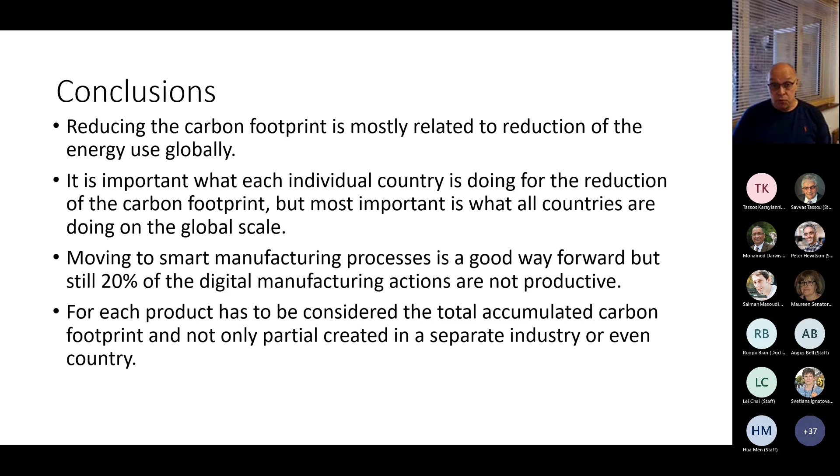All right, now something interesting. Very soon, on the 7th and 8th of June, it will be the 2022 Decarbonization Summit. It will be in Manchester.

So maybe some of you will be interested. Thanks for your attention. Thank you very much.

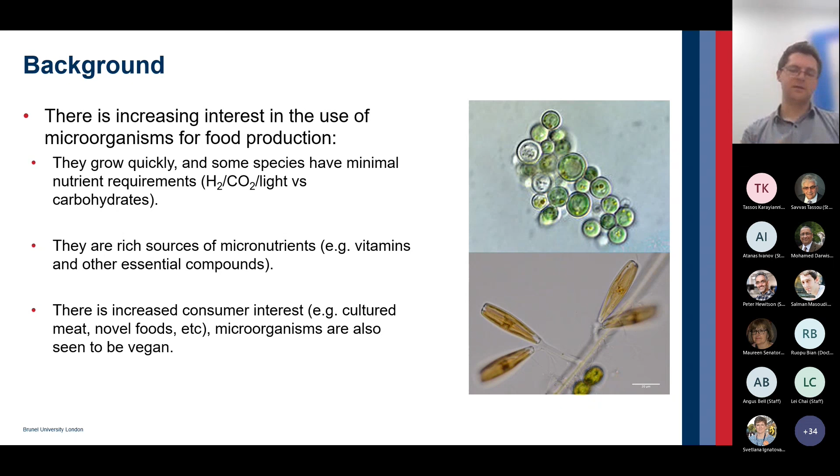And finally, there's lots of increased consumer interest in these sorts of foods, things like different novel foods, fermented foods, and cultured meat. Microorganisms also have the advantage of being seen as vegan.

Using microorganisms in food is not necessarily new. This is something that's been happening for thousands of years. So if you think about things like yogurt, cheese, wine, these have used microorganisms in some capacity.

However, there are some issues in terms of expanding their use to be a more common food product. The first of these is just consumer acceptance, getting the general public to eat these kinds of foods. But this doesn't at the moment seem to be a deal breaker. People, or at least a significant portion of the population, is open to trying these new foods.

Another challenge is regulatory approval, just how these kinds of novel foods can go through the regulatory process to be approved for human consumption. And there's also some technical challenges.

The first of these is picking out suitable production strains. In terms of microorganisms, there's tens, if not hundreds of thousands of species that could potentially be used. A really difficult biotechnological question is how do you identify the most suitable species that can be used for industrial scale production? Another problem is scaling up the process.

Taking something that works in a lab and then making it economic at a large scale is a challenge in the biotechnology industry. And that's related to the final point, which is production costs. Compared to some alternative processes, biotech processes have lower productivity generally. They can have high capital costs and or high operating costs. These sorts of issues still are drawbacks for commercializing some of these processes.

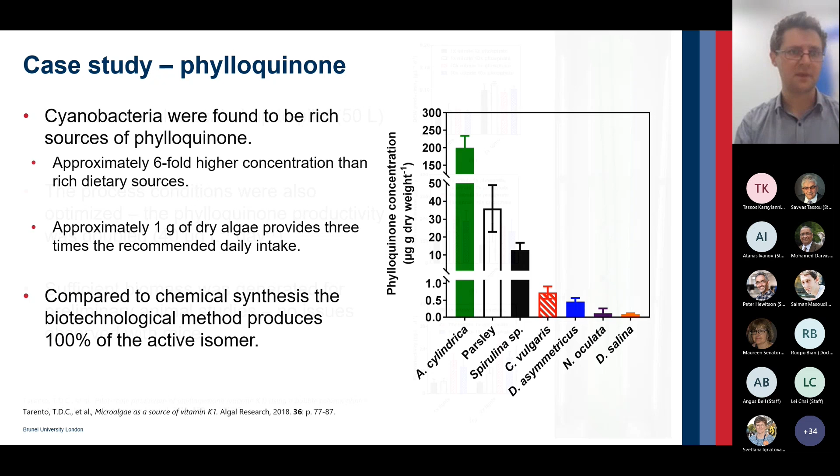The next step was to see if we could make this larger at scale and improve the process. So we scaled up the process to a 50-liter scale. In doing this, we were able to demonstrate proof of concept and also generate enough biomass to test it on animals. We found that it was non-toxic and there were no issues feeding this to mice.

To summarize this example of our work, this was the first study where we developed a scalable, sustainable production technology for phylloquinone. The nice thing is that the reactor design we used can be readily scaled up or scaled out. In addition to being a good source of vitamin K, their biomass also has a lot of protein, and it's also a good source of vitamin B12. So this could potentially be added to foods, either for humans or animals, to deliver improved nutritional benefits.

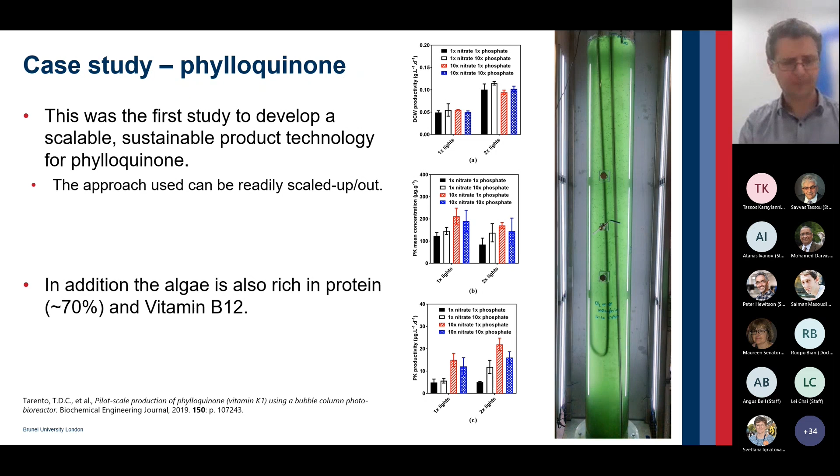So we want to understand how these reactors work, but the challenge is that there are complex interactions between the mixing inside these reactors and how the microorganisms grow. It's very difficult to do experimental measurements at an industrial scale, and most companies are very hesitant to let you do that. To address these challenges, we've increasingly looked at modeling.

Over several years we've developed CFD models of these processes. With these models, we can quantify the process performance, test different reactor designs, and visualize the process. This visualization is really key, because we can use these models as tools to scale up processes and quantify reactor performance.

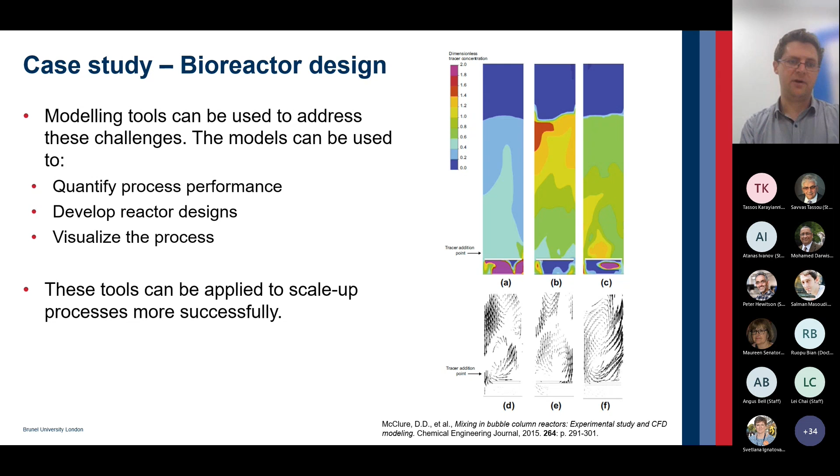We can see roughly how that looks here. This is just an example of the modeling - what happens when you put the feed in at the top of the reactor. This is just the sugar. In the movie here, it's being distributed throughout the reactor by the mixing and also taken up by the microorganisms. Using these computational tools, we're able to predict where we have perhaps hotspots, too much feed, and also zones where there is potentially not enough.

The other very nice thing about these models is that they've been validated at an industrial scale. We were actually very lucky to have an industrial partner who let us make measurements on their real plant and quantify the performance of the process. So we can take these models and apply them to different reactor designs.

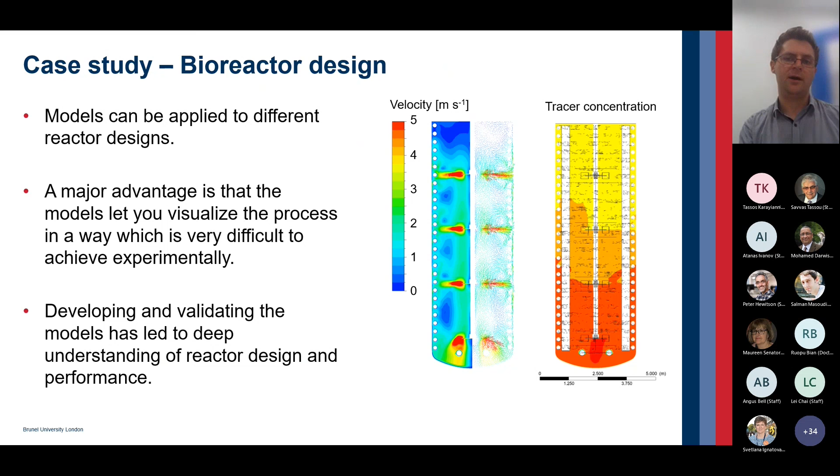This slide is just an example of things done in collaboration with Novozymes and DTU, looking at their reactors. Using these tools, we can have a deep understanding of the reactor performance, and also visualize our process and develop improved reactors, which is key to scaling up bio-based manufacture and ensuring it can be sustainable and cost effective.

To summarize our research, microorganisms can be used for sustainable production of foods and food ingredients. Having improved computational tools can make the scale up easier and potentially more cost effective. We can also take what we've learned here and apply it to production of other things, such as high value chemicals and bioplastics.

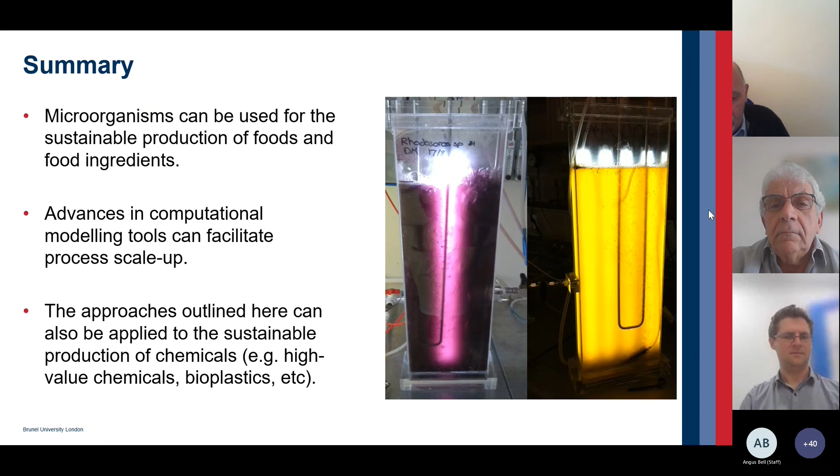Okay, I think that brings us to the end of the morning session. I'd like to thank Dale as our last speaker, but also thank all the speakers - the quality of presentations, we must all say, was excellent. We discussed a lot of issues, and I can see the worry that our academic colleagues have, both about the provision of energy, food, the environment, and I think we are leading in certain areas and working very hard in others. It was a very pleasant scene for me to see this road that we are all on. So again, thank you very much - you all deserve a round of applause for this morning.